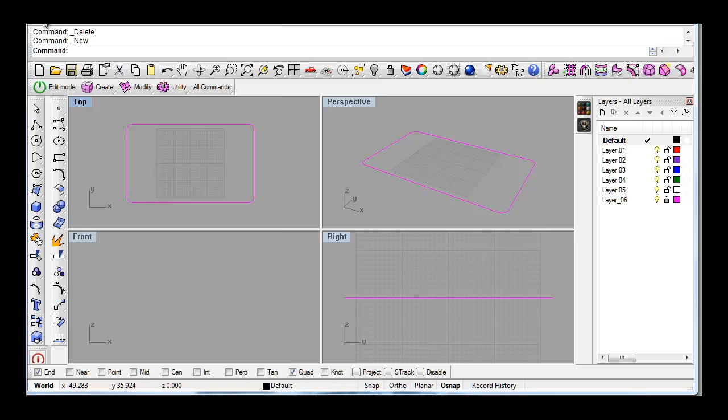Right, I'm going to see if I can fillet the edges of these letters or words or shapes. I'm not really sure what it says, to be honest. Let's have a look. Hello.

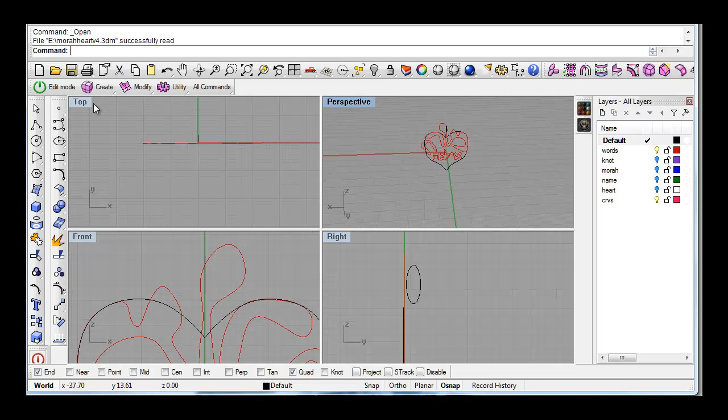No, that isn't in the orientation that I'd normally work on it. So what I'll do is put it how I do it. Everyone has their own different ways. Also, it's not planar if you look, but we can soon sort that out. So select everything. I mean, I know there's other stuff on it, but I'm not going to worry about that for now. Let's just do these letters.

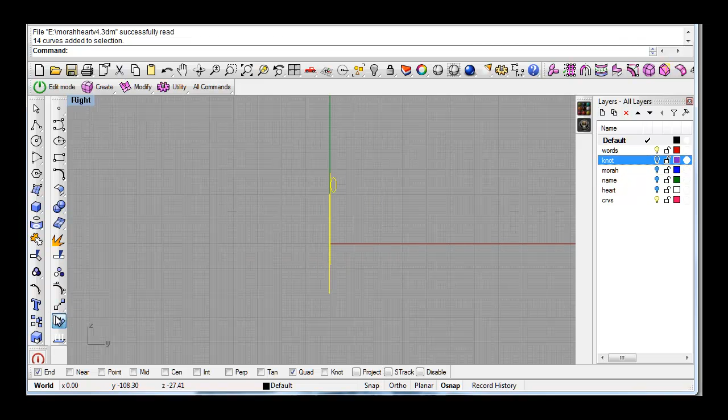So select center rotation, F4. If you press shift, that constrains it. I think it's 90 degrees on standard Rhino, I set mine to 45. Press enter, turn that to there, press enter, and that's put that there. And then if we keep it selected.

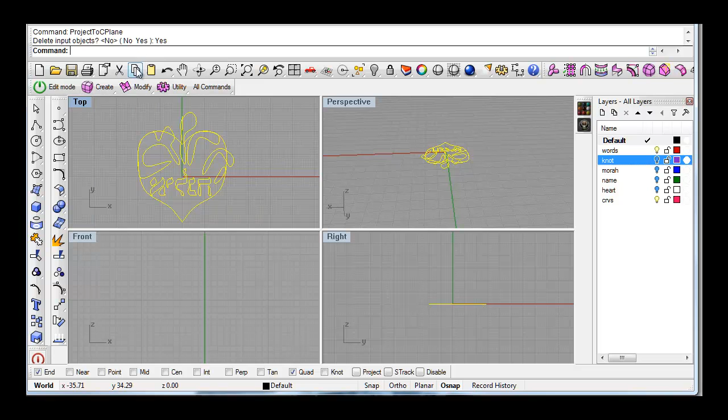Project to C plane, yep. Delete inputs, yes. So that should now put everything flat, so we can work on it. Now we're just going to concentrate on these bits here. The only thing is I don't know if that's the right way around or not, so if it isn't, forgive me.

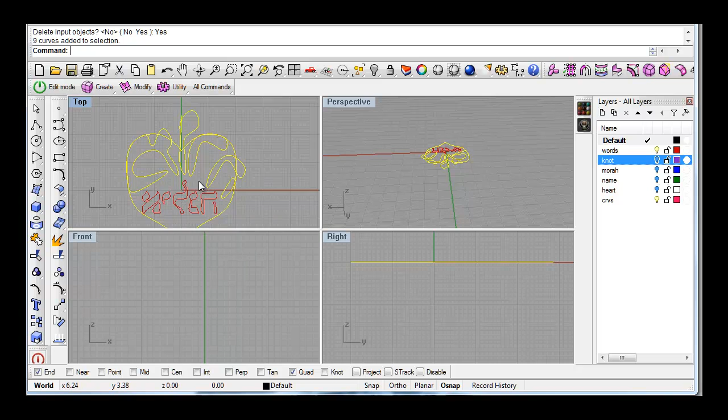So if we select that, but not that one, press Control, you can deselect. We'll just hide that lot for now. I have to keep swapping views because to get the resolution high enough on the recording software I have to have a very small window, so just bear with me. Another thing that's a pain is points on is F10 shortcut, and also that's a shortcut to stop recording software, so I have to keep remembering that as well.

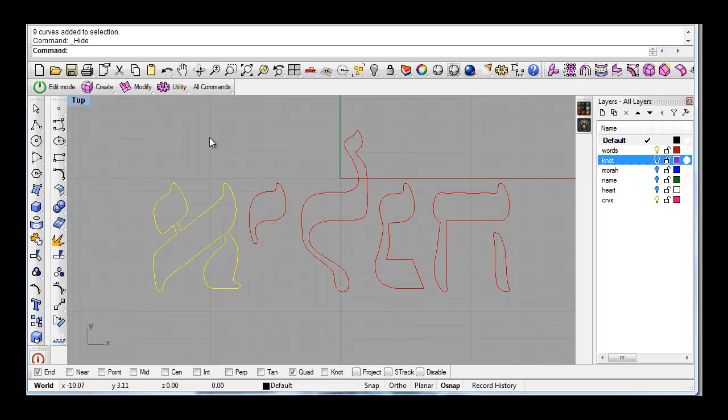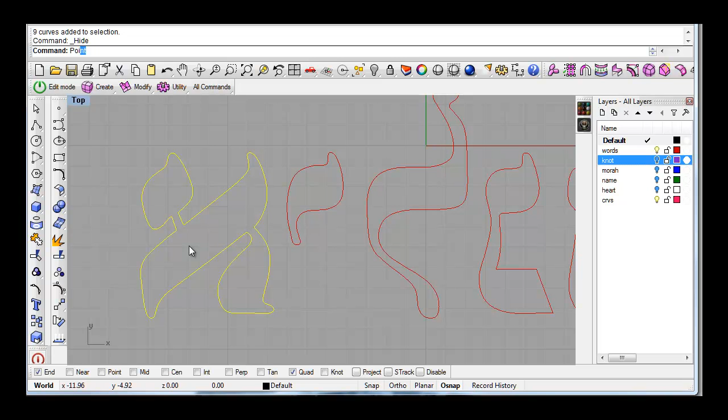But I think the problem is with this, if we just try and do it as it is - now I don't know where they've come from, these curves, if they've been imported from a font or imported from other software, but letters and shapes like that imported from other things are always dead dodgy. There's millions and millions of points. So if I go points on, there you got quite a lot.

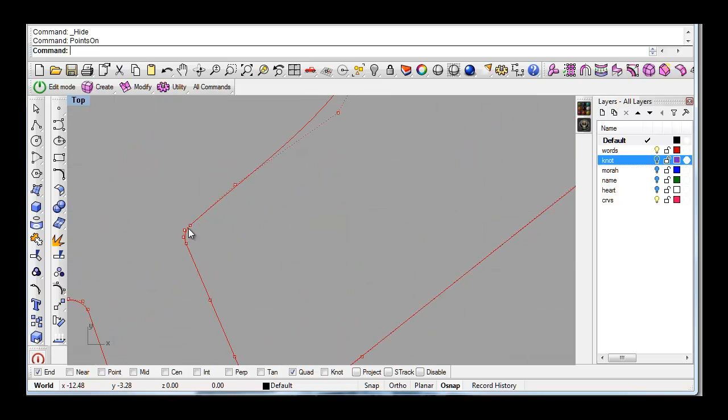Now another thing, if you're printing stuff, I don't really know about that, so maybe someone will add to this and let me know what the score is, but I know if you're milling stuff, certain bits like that you're just not going to cut, but that doesn't mean to say it's wrong what you're doing, it's just that.

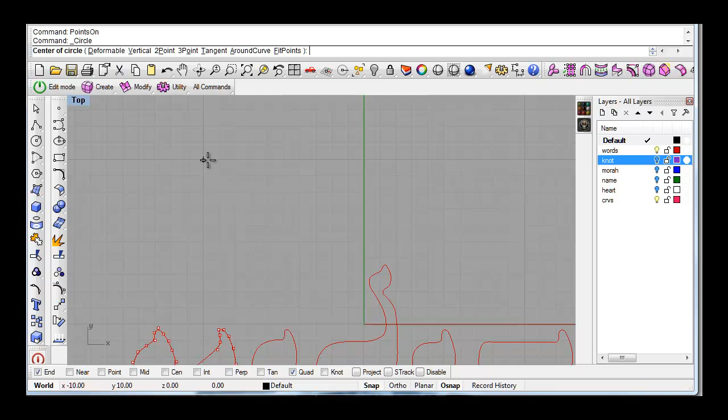Let me try and demonstrate. So if we do a circle from centre, snaps on, we go there like that, and we go 0.127, like that.

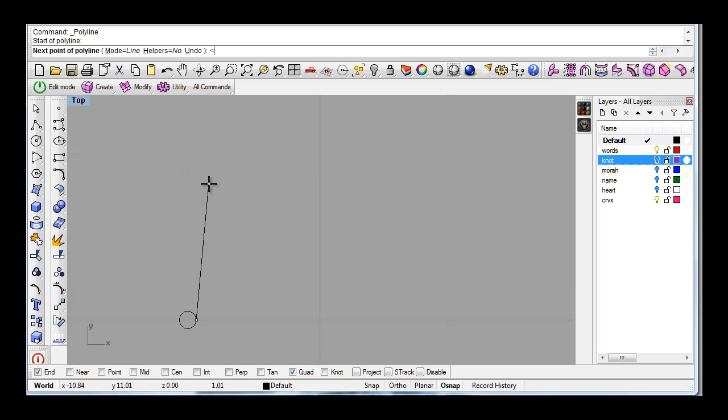Polyline from the end of the quad. Now if you press - I've got snaps on here - if you press smaller than button 5, that's going to constrain that to 5 degree points from there. So that's a vertical, so first one, 5 degree. Let's go up a bit there.

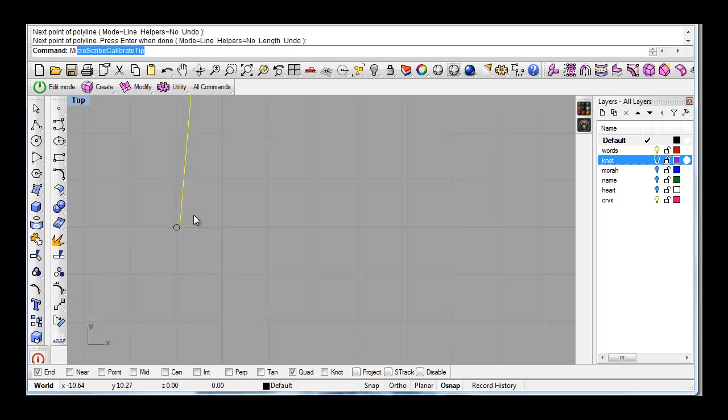And then if we mirror that around that quad, press shift, and then we can - well, we don't need to do this, do we? But we are. Select that, join that together. So that there is the diameter of the cutter.

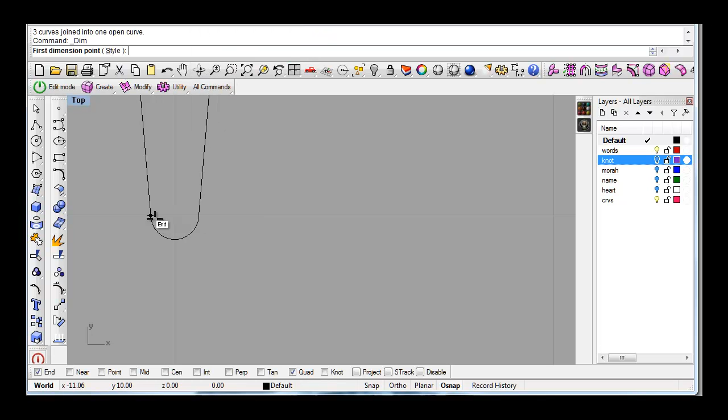So if we go from there to there, 1.3, and then looking at your - no, that's the - where's the name - there, 1, 2, 3, so that's 4 mil.

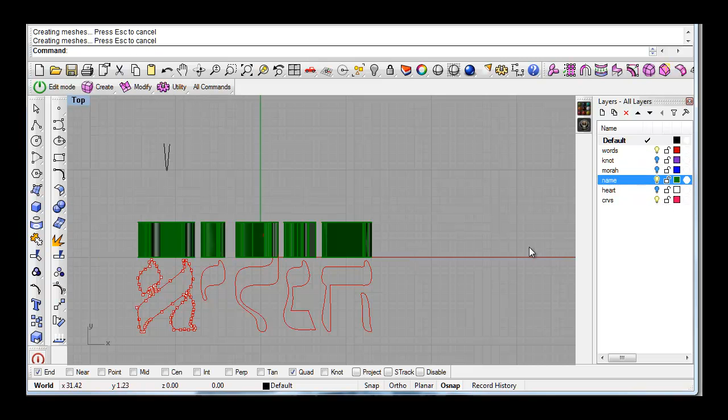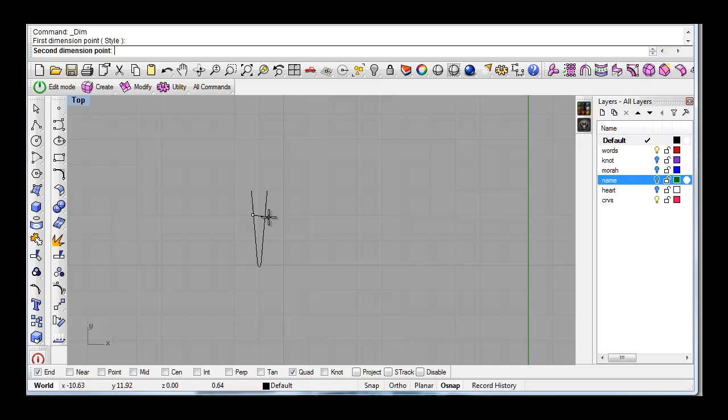I know there's other stuff in there, heart on that, but you still got 2mm on the letters there. So if you go up 1-2mm there, dimension, linear dimension, 1, 2, so roughly there and there or thereabouts. It doesn't really matter, it's only for demonstration. You got 0.5, so the smallest radius you're going to be able to cut at that depth is 0.5 of a mil.

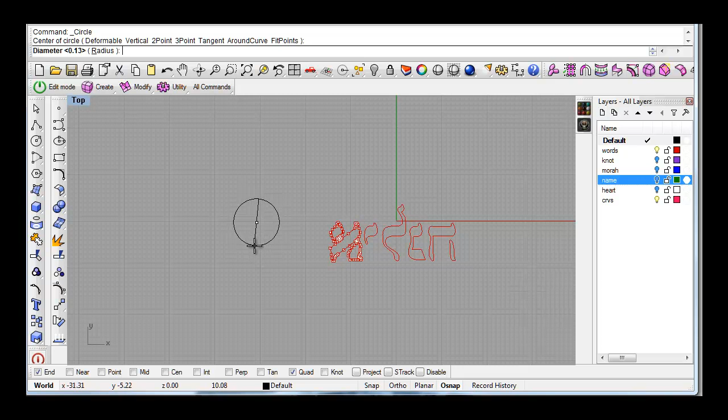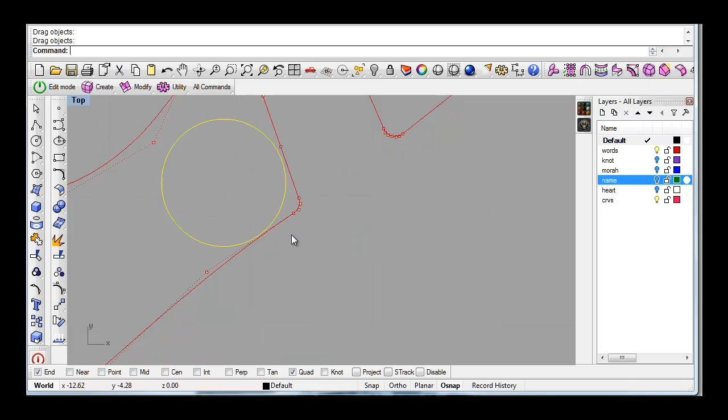So if we do that, centre of circle, the diameter 0.5. Then we bring that into there. If you see, you're not going to cut that anyway, and you're not going to get that in there anyway, so it doesn't need to be as precise as it is.

Now, I know things are different with printing, but I've got a feeling that you'd lose any benefits you'd get in the sharpness of the corners on clean up, and if you could clean up in there. So, like I say, I don't know.

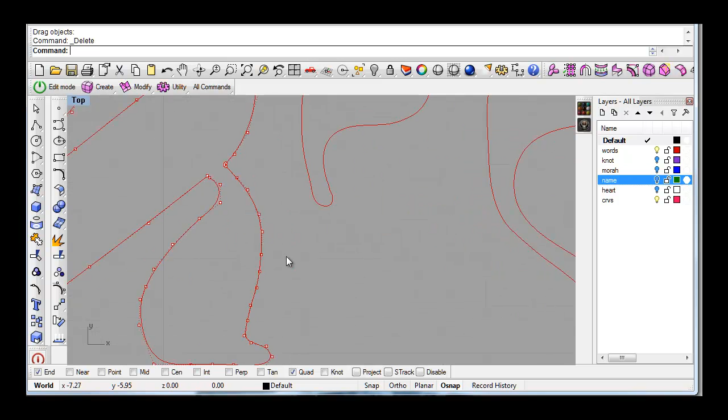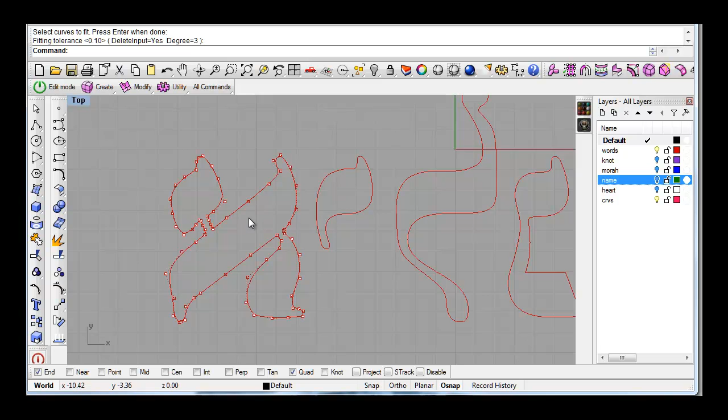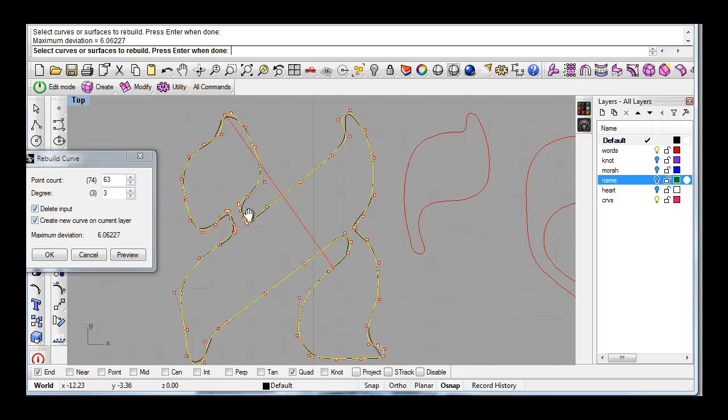So if we fit curve, CRV, to that, tolerance of 0.1 - so it's still, well, you can even do it like the rebuild, to be honest. So if you look at that, it's 74 points. I think it was 90 originally, but I think that's not good enough there.

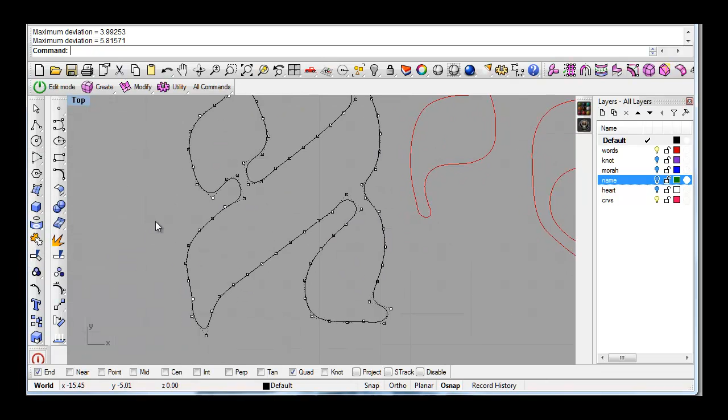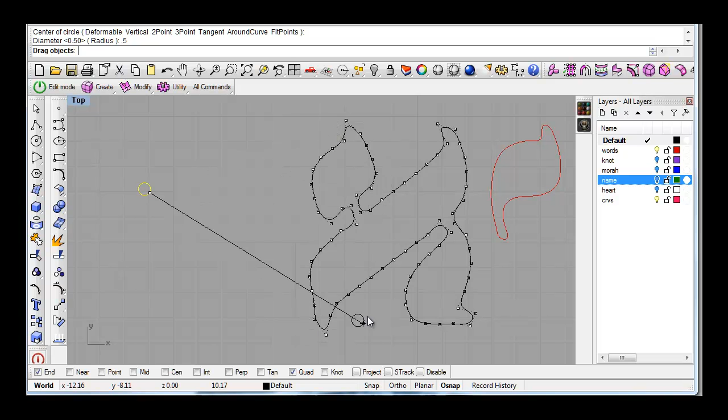Yeah, so if we bring back our - to do, delete it - our circle, you're going to get in, but so that'd do, I reckon. Let's come into that one.

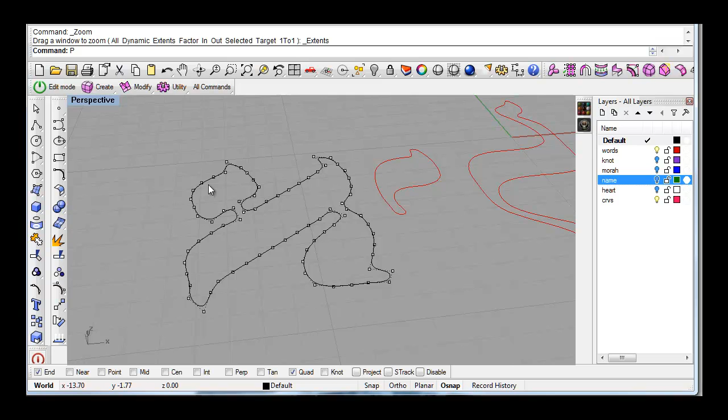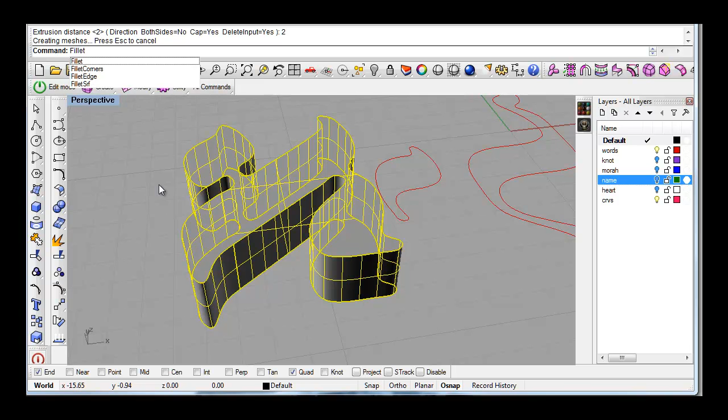So if we points off, surface, extrude, straight, both sides no, cap on, yeah, distance 2mm, didn't we? And then fillet edge, try that. Yeah, that works.

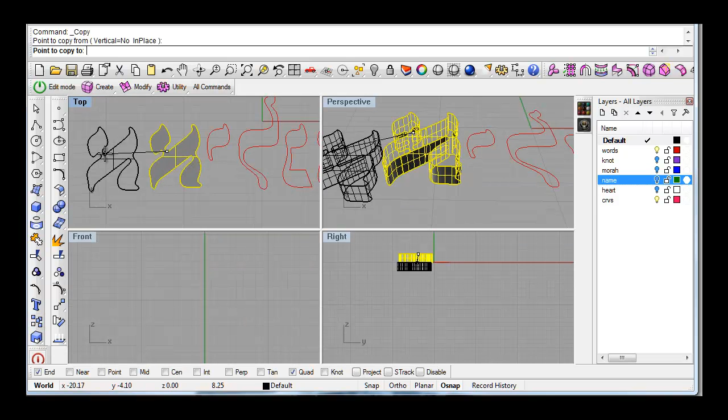Now if we go back, copy, that there, fillet edge again.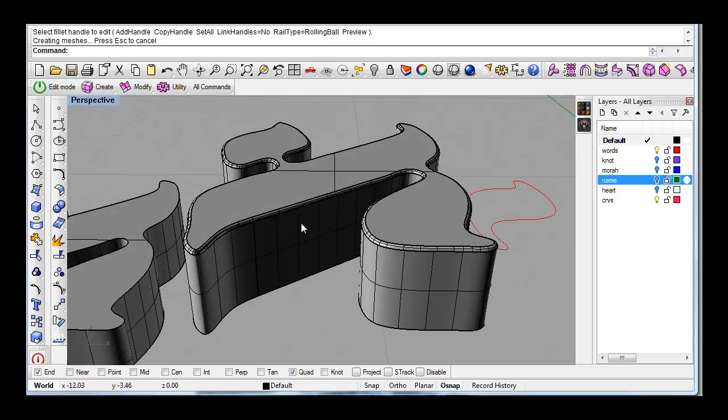Now, to be honest, that radius is that small, it wouldn't even show up, and any benefit that you got from it in polishing, you just lose. But what it does do is make the renders look good.

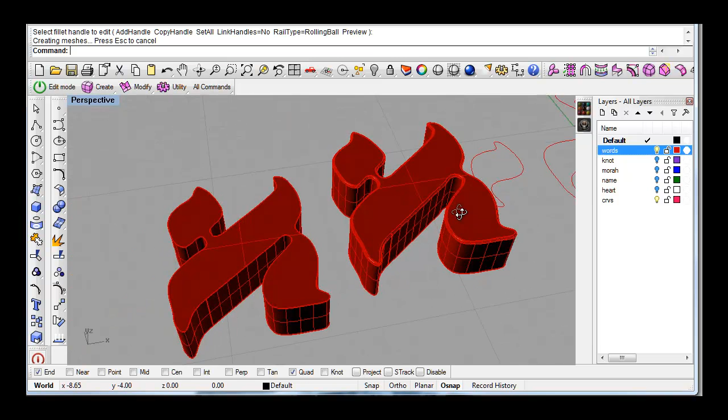So if we, let's swap them to a different colour. So if we go over to render mode there, whereas this looks dead boxy and horrible, that looks - you know, there's a bit of shadow in it and bright spots and stuff - it just looks better.

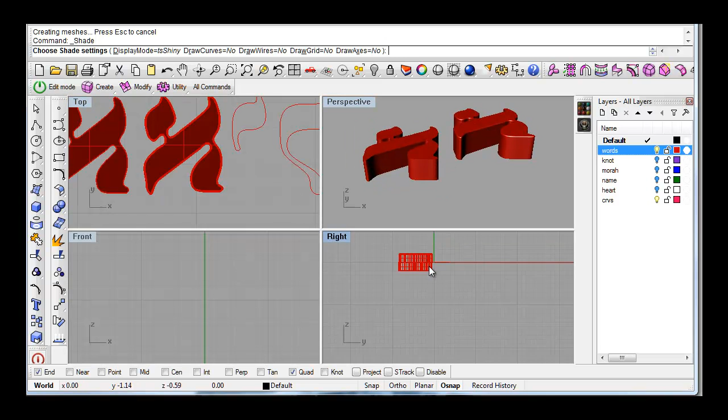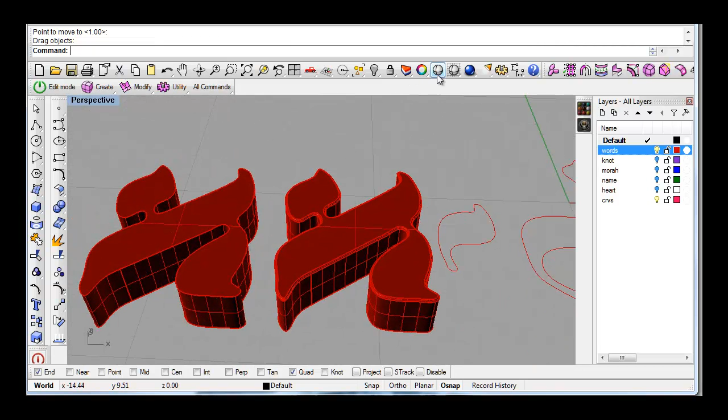There you go, that's how I do it. Alright, I hope this helps. Thanks, bye.